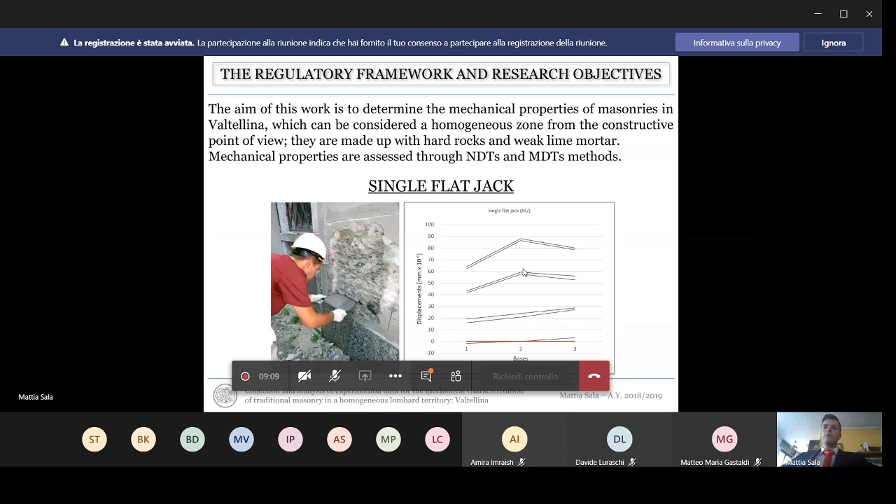The tests are the following ones: the single flat jack to determine the stress state inside the masonry, the double flat jack to determine the compressive strength and the deformability modulus, penetrometric test to evaluate the quality and strength of the mortar, sonic test to evaluate the quality and homogeneity of the section, corings and video endoscopies to evaluate the thickness and the section of the masonries. And these are some of the other tests performed by me.

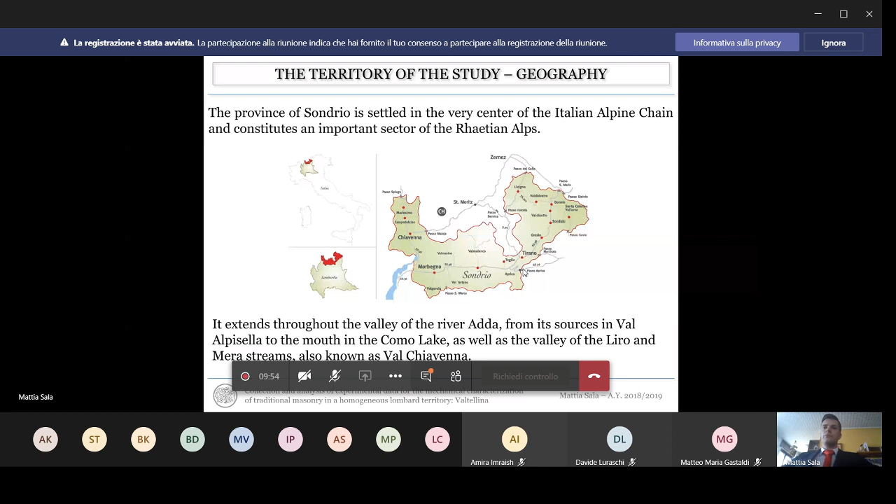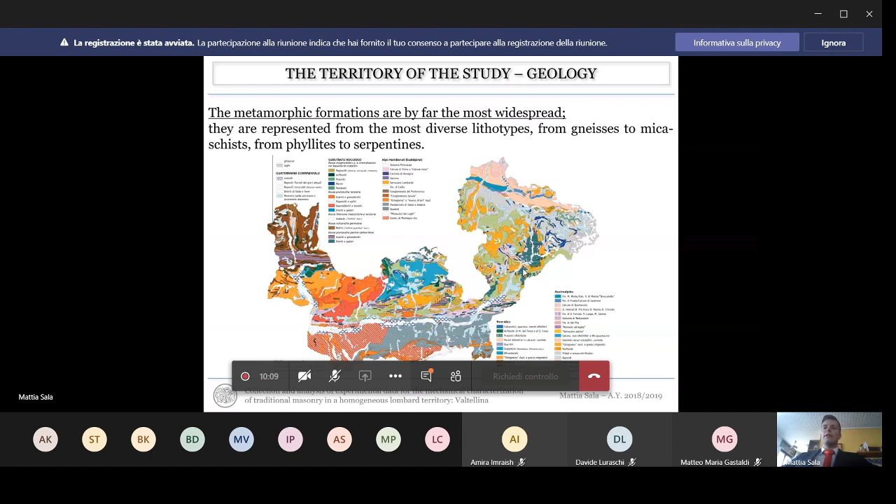The territory of study, as said before, is the Valtellina, which is a region placed in the center of the Italian Alps. It follows the flow of the river Adda from the source in Livigno to the mouth in the High Como Lake, plus the region of the Val Chiavenna, which follows the Mera and Liro stream. The whole region is placed on the Swiss border on the north side. The geologic point of view is really important as we speak about stone and mortar masonries. Valtellina is placed in the western area of the Alps, which is characterized by silicate rocks, and moreover, it's placed along the Tonale Fault, which is an imposing tectonic line. For these reasons, the most widespread lithotypes of Valtellina are the metamorphic ones.

The constructions are, of course, influenced by the territorial context in which they are inserted. For this reason, the stone had a predominant role in the constructions of Valtellina, starting with the dry stone ones and the now famous terraces, arriving at the old typologies built with stone and mortar, such as the rural houses, the palaces, the fortified structures, and the churches.

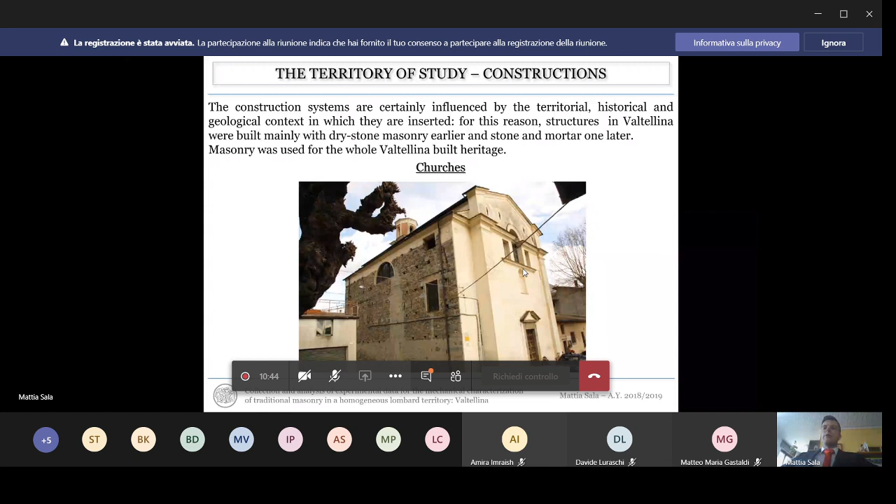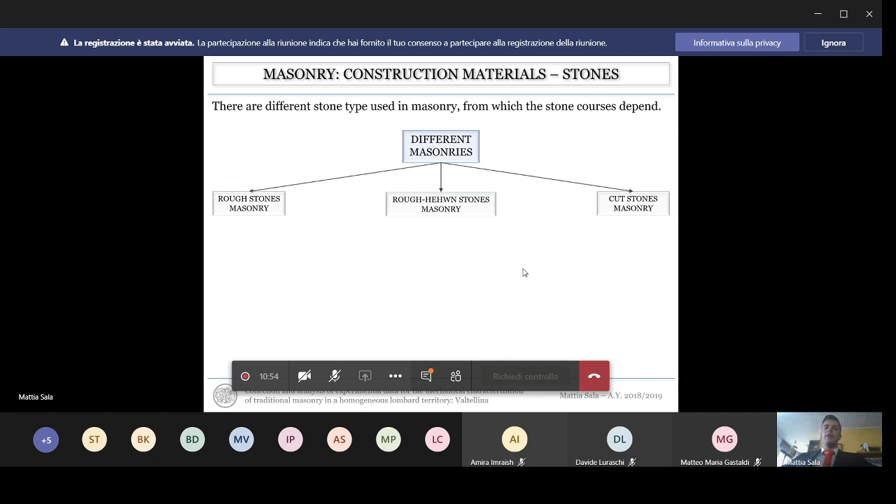The masonry is a composed system which is made out of stone and mortar. According to different stones, there are also different related masonries, and I've identified 3 types: the rough stones, the rough hewn stones, and the cut stones masonries. In the first type, the stones are taken directly from nature or split from erratic boulders in the nearby of the constructions, and they are characterized by a polyhedric form. The second type is similar to the previous one, but the stones are slightly processed to obtain a better shape. The cut stones come generally from hard rock, which has a good capability to be processed into parallelepiped elements.

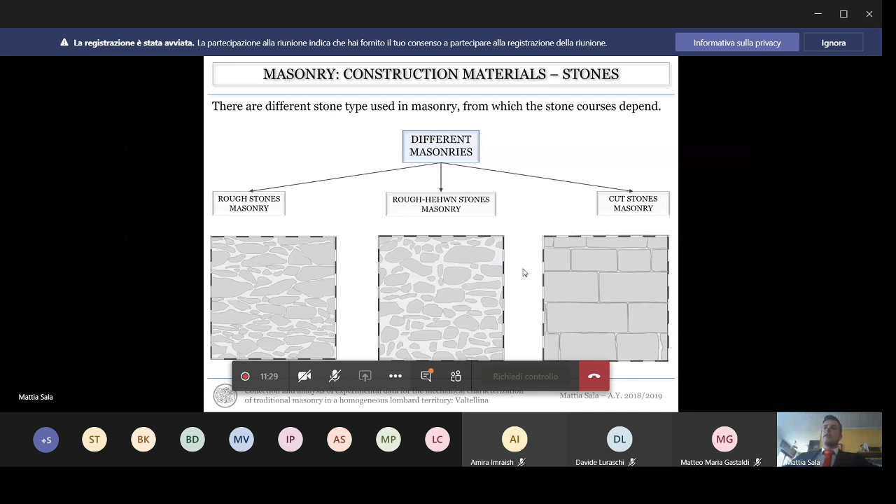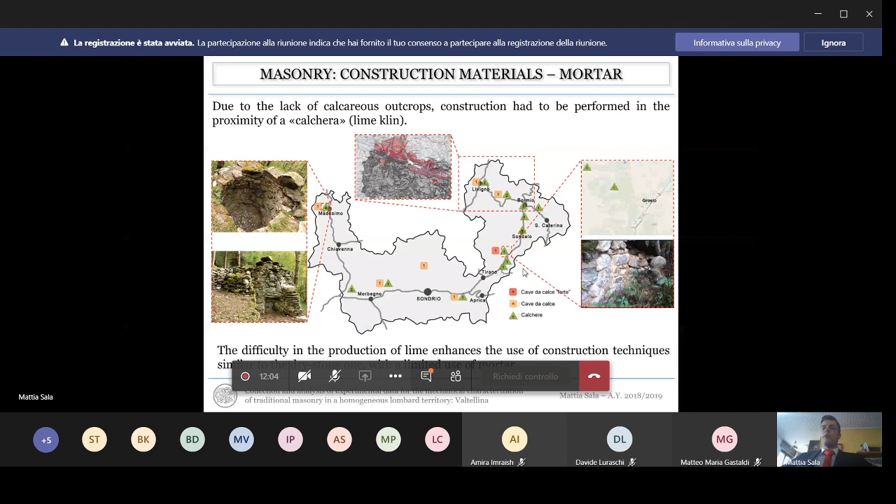The mortar. The Valtellina territory is characterized by a scarcity of calcareous outcrops, and the main one is the one of the main Dolomia in the area of Bormio. On the other part of the territory, there are only localized outcrops, where generally also the lime kiln was built nearby, such as this example in Madesimo and this one in Grosio. In literature, there are some analyses on mortar samples, and it's found that the binder aggregate ratio is really low, highlighting also in this case the scarcity of the calcareous outcrops.

Construction techniques. In the analysis of the construction techniques, the role of the dry stone is really important. Thanks to the similarity between the dry stone and the stone and mortar masonries on the Valtellina territory, the lack of information regarding the construction techniques of the stone and mortar masonries is partially recovered thanks to the ones found in literature regarding the dry stone ones. Some points in common between the two, identified as fundamental, are reported in the following points.

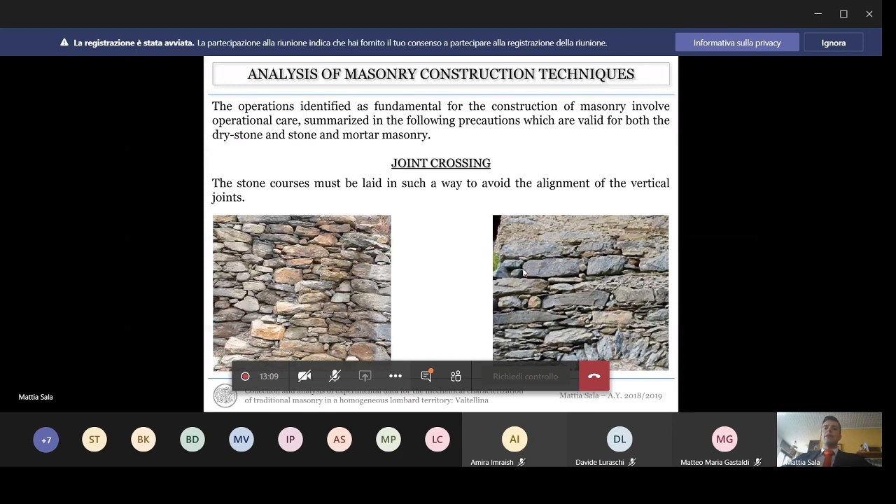The first one is the stone balance, which means that each stone has to be supported at at least 3 points to be in equilibrium, like a common rigid body. The next is the joint crossing, which means that when placing the stone courses, the alignment of the vertical joints has to be avoided in order to avoid the formation of weak points. The horizontality of the stone courses helps to distribute the vertical loads, and we will see later that it is an important point to evaluate the mechanical properties of the masonry.

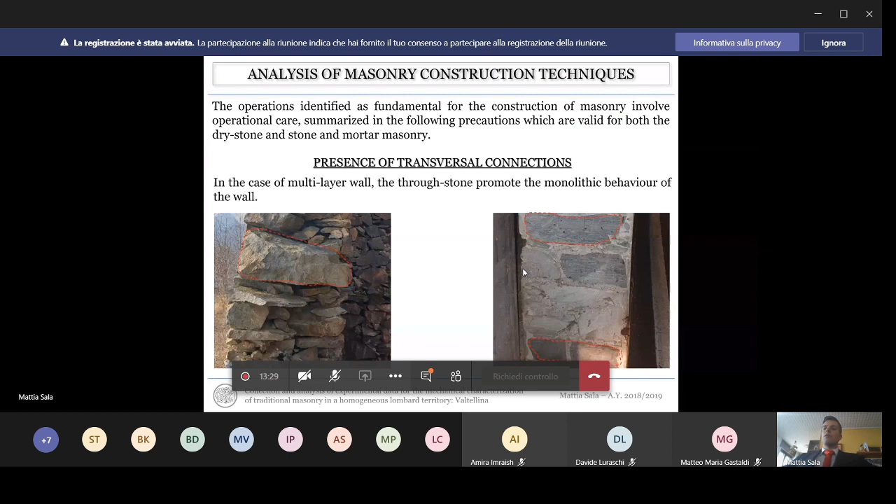The presence of transversal connections, in this case the through stone, which in multi-layer walls links the various layers, is important to promote the monolithic behavior of the wall itself. And the last one is the wall crossing, where in the corner the stones of orthogonal walls have to be placed in a proper manner to promote the box behavior, which for masonry construction is fundamental to sustain the horizontal actions.

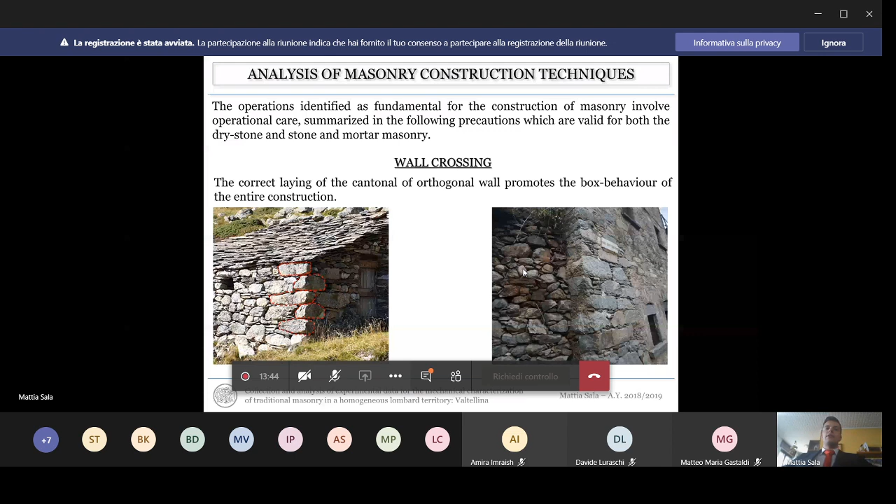Passing to the sections, we see that in the case studies the mean thickness detected is 67-68 centimeters, which is in line with what was found in the literature regarding an analysis of the Valtellina churches. Moreover, there's a feedback in a marble plate hung in Tirano reporting the measure of the arm, and this measurement of 67-68 centimeters, the arm, is the main one used at the time for sizing the masonries.

Analyzing instead the masonry in the elevation, we see that the mean quantity of mortar for the case studies is 34%, which also in this case is in line with what was found in literature regarding the masonries of Lombardy. But in any case, this is only a qualitative value, as the quantity of the mortar should be evaluated in the section.

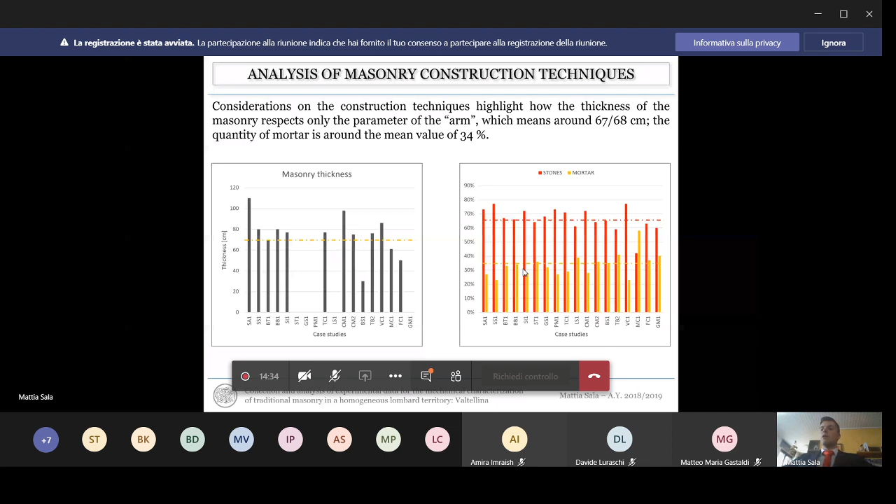To deepen the analysis regarding the construction techniques, I have analyzed 2 case histories, which are the Masegra Castle in Sondrio and the Sant'Ignazio Church in Ponte Valtellina. For both of them, historical and material analyses were performed, as well as corings on both foundation and elevation walls, and mechanical properties analysis. And some points are stated.

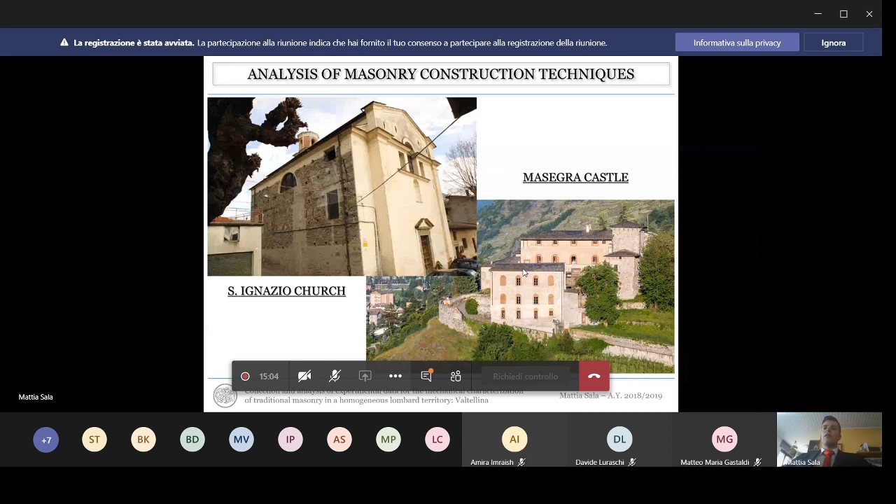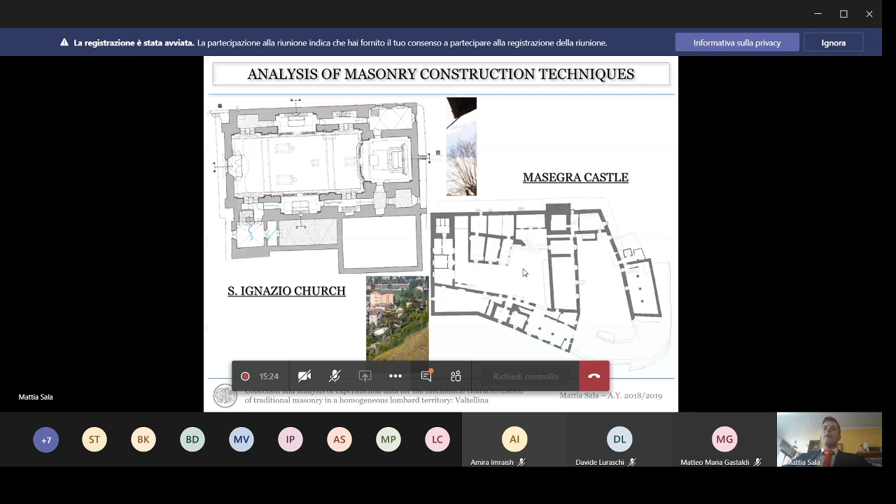The materials are of a strictly local origin, with a prevalence of metamorphic rocks. There is a scarcity of use of mortar. The masonry of Sant'Ignazio Church was built mainly with a disordered texture, while that of Masegra Castle has both a disordered texture and rather horizontal courses. The mechanical properties will be discussed in the next points.

Passing to the data analysis, the case studies are widespread over the whole Valtellina territory, and the data coming from the various tests are collected into data sheets, organized as follows. Building description with photo, position, historical and structural description, and surveys. Masonry description, both in section and in elevation; flat-jacks, with position, data, graph, and results for both single and double; corings, position and results; sonic test, position and results; penetrometric test, position, data, and results. Moreover, for each case study, summary data sheets were produced.

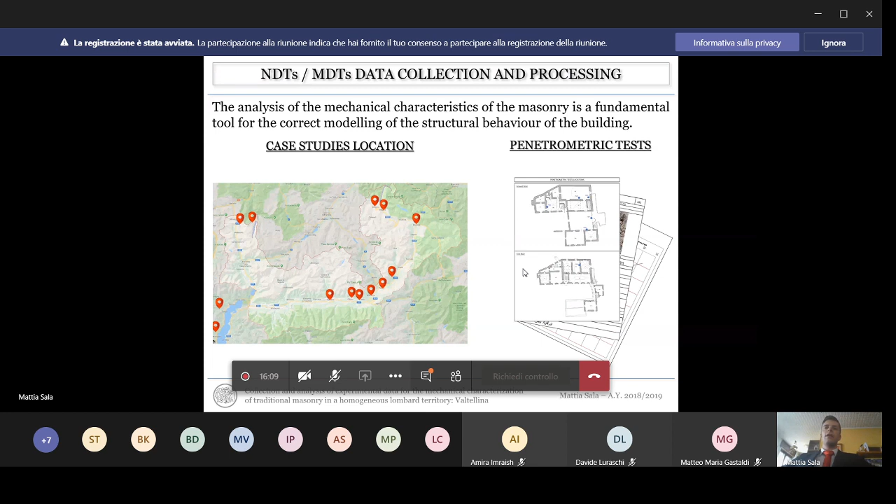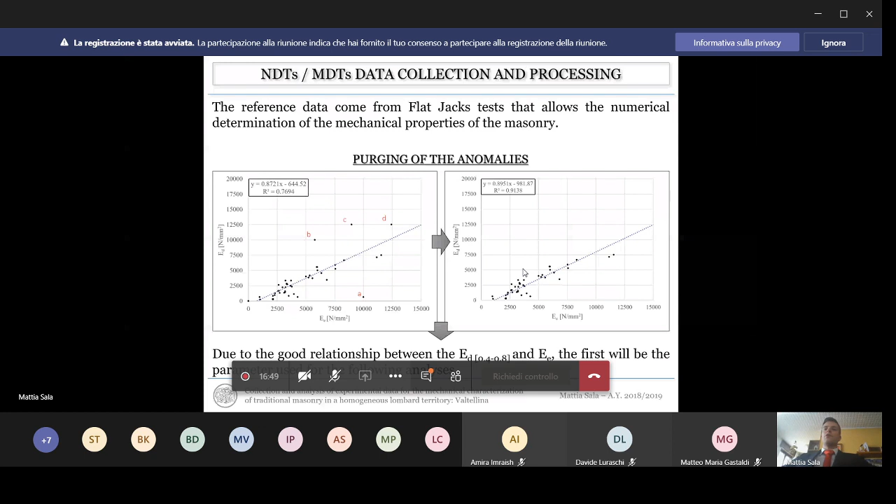So the next step was to search for some matching between the mechanical properties of the masonries and some circumstances which could be relevant for the buildings.

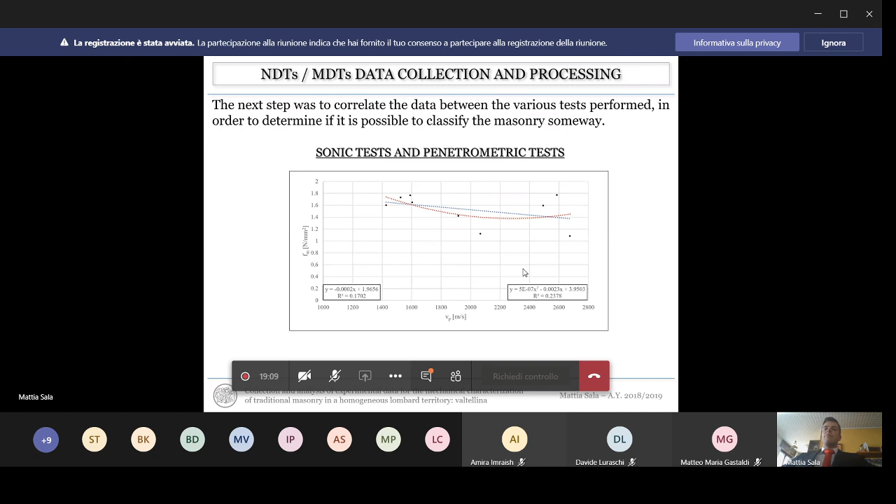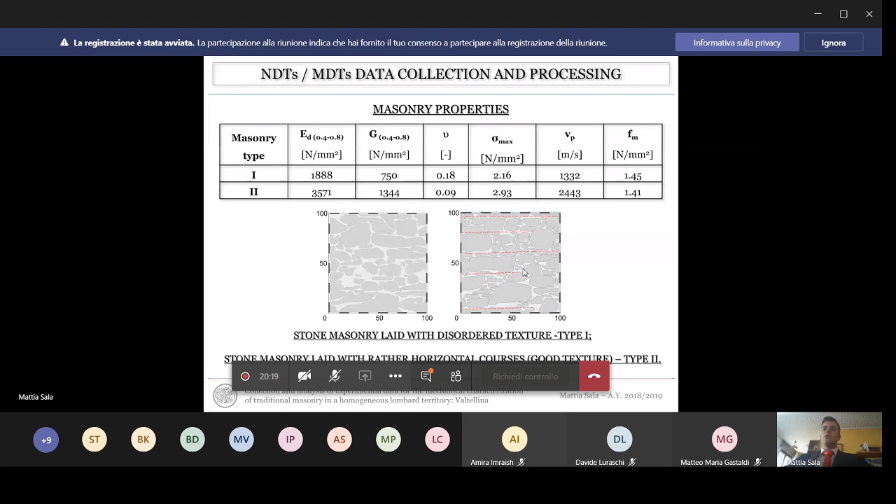In the comparison with Sant'Ignazio, only indirect tests were performed with sonic wave velocity and the penetrometric test, and the mean values found are in line with the values found for typology 1 of Valtellina. Moreover, we see the masonry was made with a disordered texture, and for this reason, the mechanical properties of the Sant'Ignazio church can be taken with a good approximation as similar to typology 1 of Valtellina.